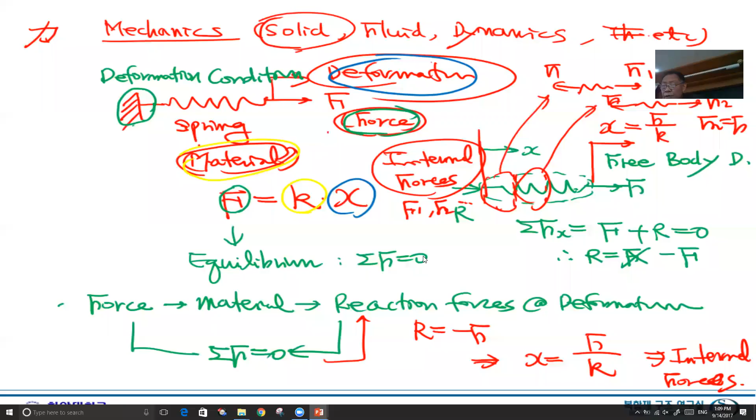Well, I will just briefly go through this slide to emphasize one more time what is the strength of material, what is mechanics of materials. That's the subject we are covering this semester. So we need to clarify the concept of the strength of material.

There are two keywords. One is mechanics and the other is materials. Mechanics, as I mentioned yesterday, is the subject about force. Okay, force. Well, I'm not sure if you understand the Chinese. This is a Chinese character to represent force. Okay, force applied to solid, can be applied to solid.

Solid means a material which can deform. Okay, it's solid, but it's not a rigid body. It is a deformable body. Deformable body means how much deform? Well, it depends on the material and depends on the force. But in most cases, in engineering materials or engineering structures, deformation is very slight, very small.

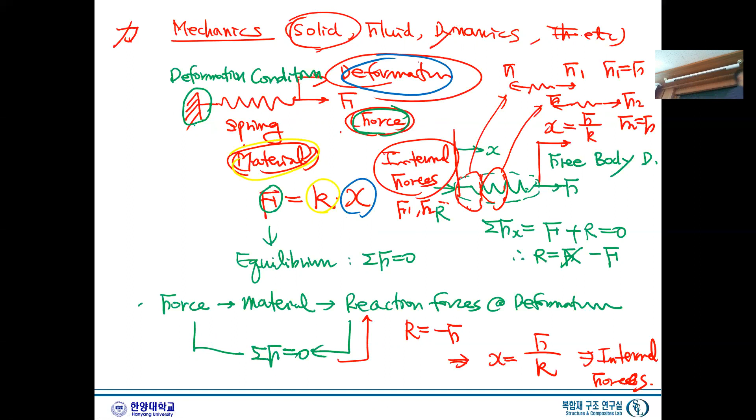In other words, we have a fixed point, we have a spring, we have a force, right? Now, let's take a look at this spring. And again, there is an equilibrium condition. Equilibrium condition simply said, we can say sum of F equals 0. All the F equals 0, and sometimes moment equals 0. All the summation of force and summation of moment have to meet this equilibrium condition.

Now, if we take a look at only the spring, okay, this is a force. And where we have a fixed point, we have a fixed point here. This is a deformation condition.

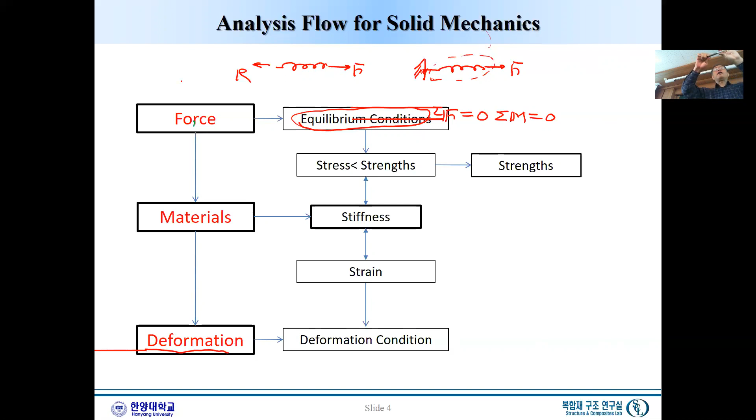But now we are considering a deformable body, which means that all the forces applied to a body have to meet force equilibrium, and then what we are focusing on is the deformation of this body. So when we apply a fix, how much force do we have to hold it? That is the unknown force R.

Unknown force R. So if the sum of Fx equals 0, then F minus R equals 0. So R simply has to equal F, right? So this is the force equilibrium. So now you can see what this force equilibrium is about.

And what is the stress? Well, if we have a section, a very small section, there will be internal force. And the stress is not clearly defined in the spring, but imagine instead of this spring we have a certain bar, and then we apply the force and we fix it. Exactly the same story goes for this bar.

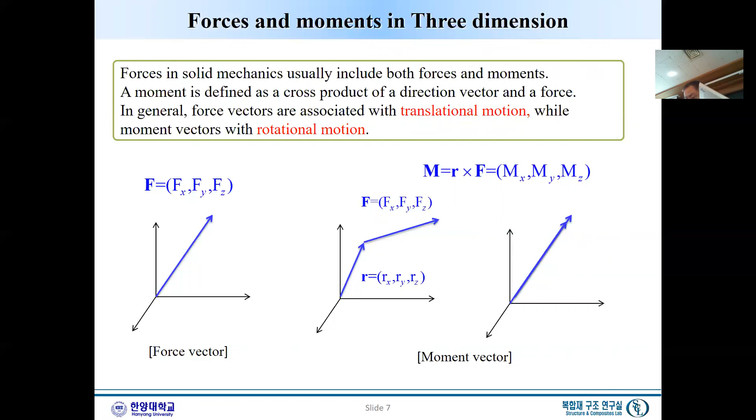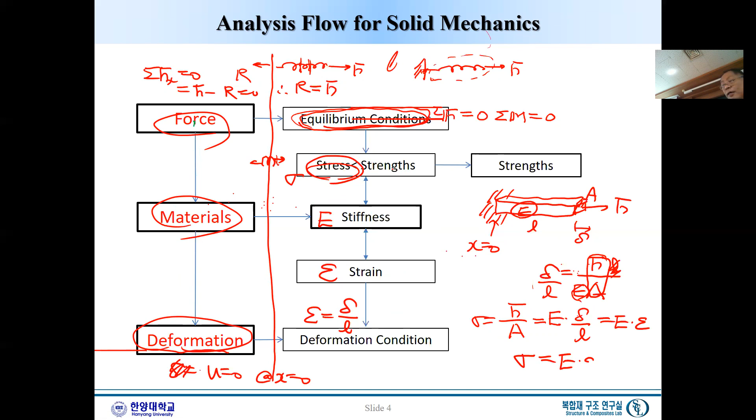And again, let's divide into two parts. This is the externally given condition, and this is the internal condition and internal concept. Say stress - this one is the stress and strain. This is a stiffness relation. And equilibrium, by the way, doesn't only apply to this force, but also applies to internal stress.

What does it mean? Well, if we cut this part, there will be a certain small part, right? Small part, there will be a certain force here, this force F, this force F. And on the right-hand side, there will be a body like that. This is the F and this is F.

So as you can see here, external force applied to internal, and internal will have all the F, F, F, F, F. So this equilibrium condition is not only applied to external force, which helps us solve reaction force, right? But also this equilibrium equation will determine how internal stresses distribute inside the body. Okay? So equilibrium and stress.

So the equilibrium equation applies to this stress, and stress-strain is the stiffness, and strain and deformation is the relation. So you can see that the three major concepts: equilibrium, material property or stiffness, and strain and deformation. Those three concepts are quite overlapped or linked by this concept.

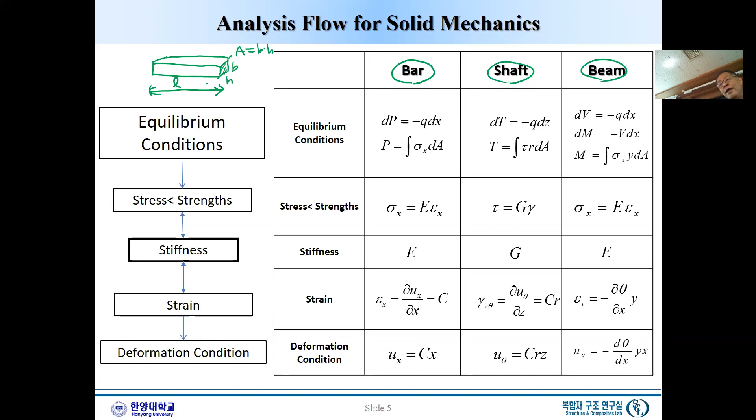And now, when we apply force in the direction of this length, we already noticed there should be the same force from the equilibrium condition. In this case, let's call it F, and this structure is called a bar. So in the bar, the structure supports load in the same direction as the structure.

How about the shaft? Well, in the shaft, it's not because of different material, not because of different dimensions, but the only difference is the way it supports load. In other words, the same structure designed to support a certain load, torque - then this structure is called a shaft.

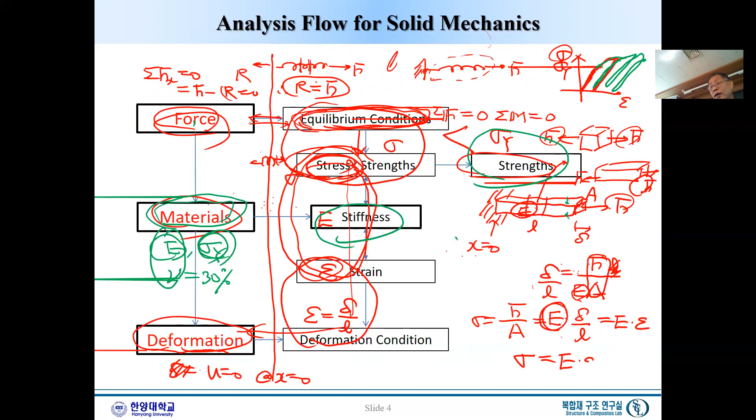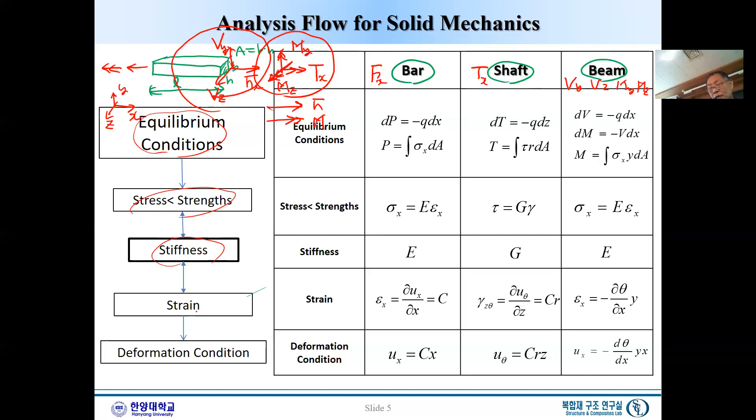Now, as in the previous slide, we went through equilibrium and stress and so on, and now this is exactly the same: equilibrium, stress, strain, and stiffness. In this course, strength of material 1, the equilibrium condition is that we applied a certain force, F, which caused all the stress. For example like this, and all these stresses, the summation of sigma x over the area A equals F.

This is the equilibrium internally, and this is pretty much the same. When we have this, we have a torque and all the shear stress distribution, and that is the equilibrium. So equilibrium and material stress-strain relations: shaft needs a different material property, which is shear stress, and stiffness is tension or shear. Torsion is always shear, and bar and beam is always tension stiffness. And strain is related here. Well, this is just a summary, so I will skip the detail.

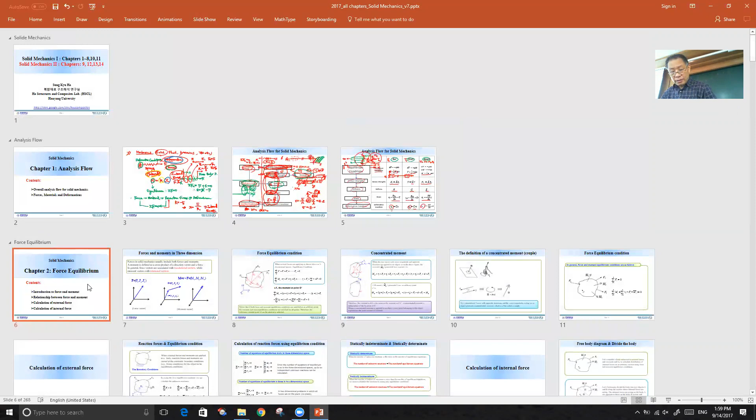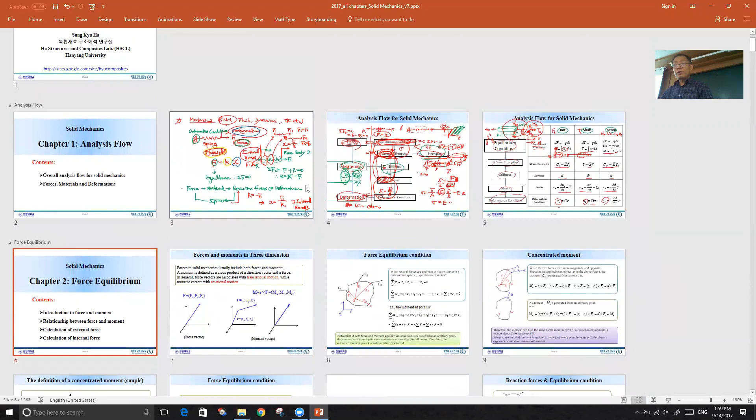Okay, this is a very critical part. So this week, as you can see, every chapter, I will show the chapters. Can you read this chapter name? Yes, force equilibrium. Why? Well, as we can see here...

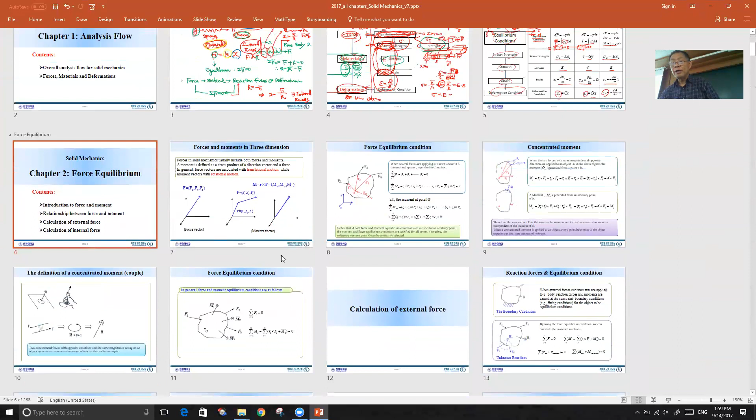The first concept is force and force equilibrium, right? That's why the first chapter is all about force equilibrium. That is chapter 2, the first chapter. And here we define force and moment and all the equilibrium conditions, starting with the general geometry and all kinds of load.

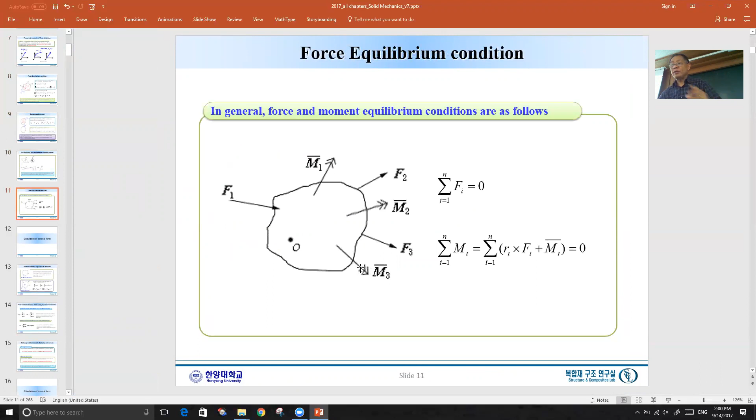Sometimes you have a reaction force, constraint. Sometimes you constrain, and this is the applied load. This is a material property. You apply the load with a certain geometry deformation condition. Always three: deformation condition, material properties, and forces.

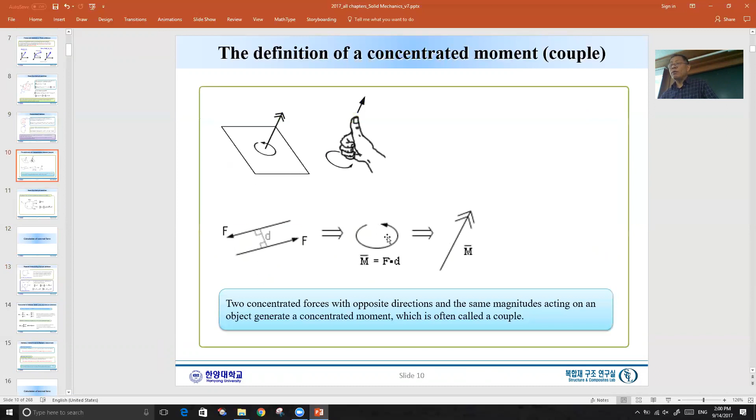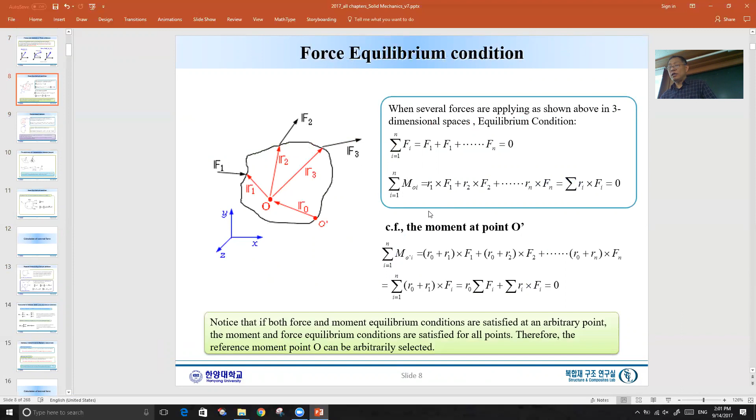Now there will be a certain reaction force. How do we calculate the reaction force? Yes, force equilibrium. We need a reaction force to move to the next step. So for that purpose, we define the moment. We go through all force and moment, 3 force equilibrium and 3 moment equilibrium. So this chapter is about force equilibrium.

Sometimes a very important point is how many equilibrium equations can we have? Only 3 force, 3 moment, right? These are force equals 0 and moment equals 0. Force is a vector and moment is also a vector. So always 6 equations.

Now, if we have a reaction force, somehow we have a fix, and the number of reaction forces is more than 6, can you solve that reaction force? No, we cannot. So this problem is called statically indeterminate. What is statically? Well, force-wise, force condition only, we cannot solve. So it's a statically indeterminate problem. But if the reaction force is less than or equal to force equilibrium...

Then reaction force can be solved by only considering equilibrium equations. This is called statically, or equilibrium-wise, reactions can be determined. So statically determinate. So it's very important to distinguish whether this problem is statically indeterminate or statically determinate.

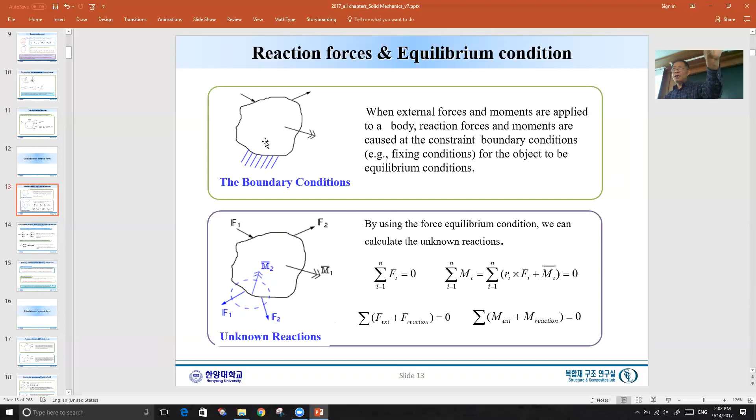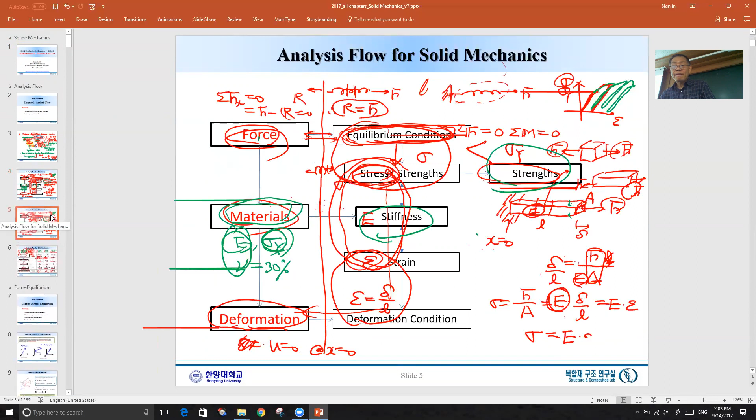Why can this be important? Well, the solving procedure can be very simplified. In this flow chart, let's say statically determinate. Determinate means that this is just force and reaction force, all can be determined.

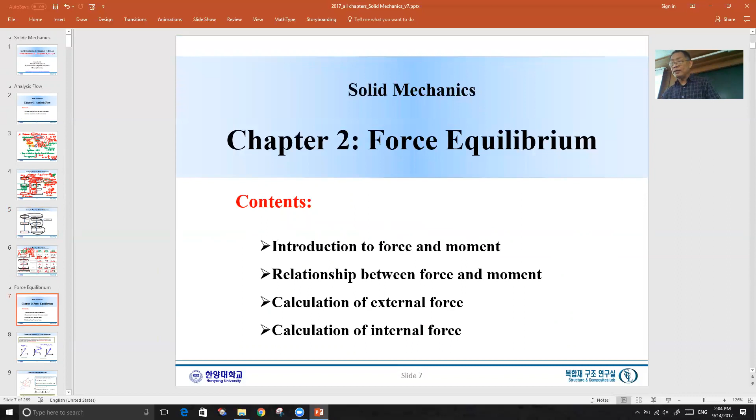And this problem all determines itself. Problem solved, all the reaction forces solved without considering the bottom condition. But a statically indeterminate problem cannot be solved this way because these are coupled. So all the unknowns have to be solved all together. I will go through this case, not much time, but anyhow, this is statically determinate and indeterminate, and this is force equilibrium.

What are the next chapters? Next chapters are about deformation. You remember the bottom: deformation, strain, stiffness, stress, and equilibrium, right? So we touched equilibrium, and now we consider deformations. And what is deformation? I'm sorry, that's not right, deformation is not the bottom part, it's the whole part.

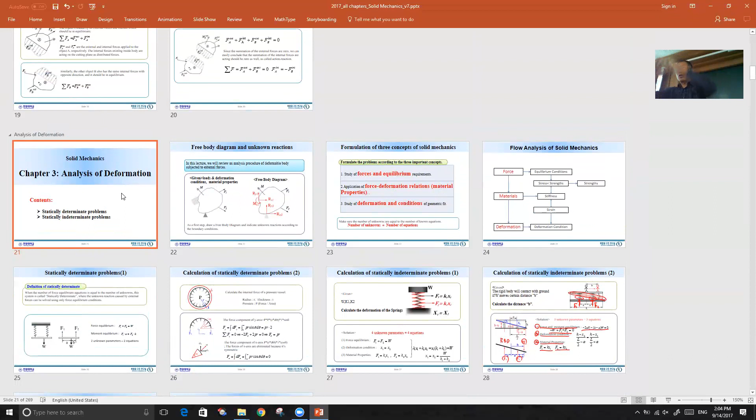Okay, this is all about statically determinate and equilibrium and force equilibrium and so on. This is just a simple application of the concept applied to a simple case such as this. We have two springs, inside and outside, and apply external load W. Okay, this is the case.

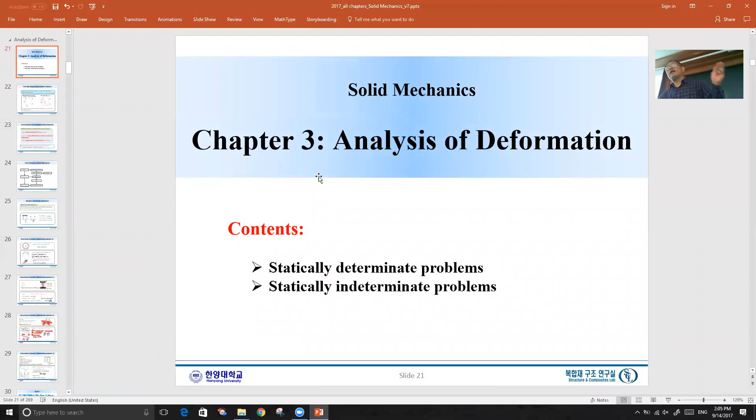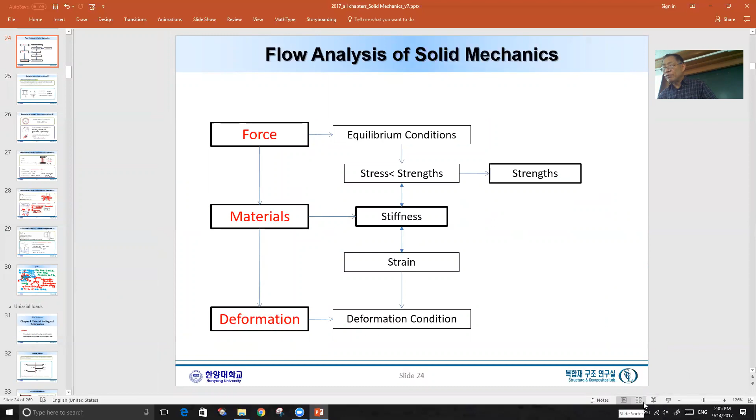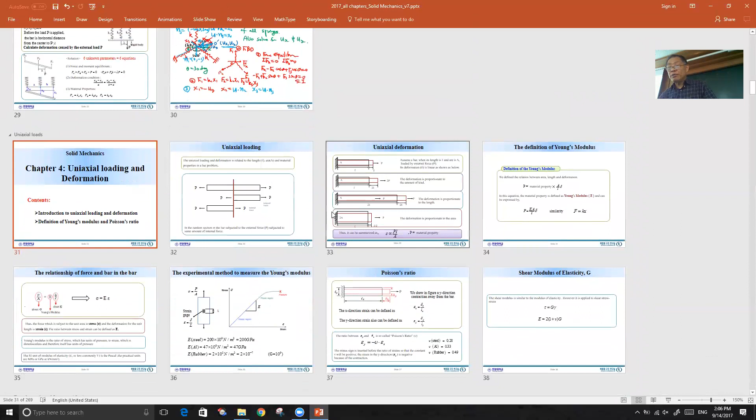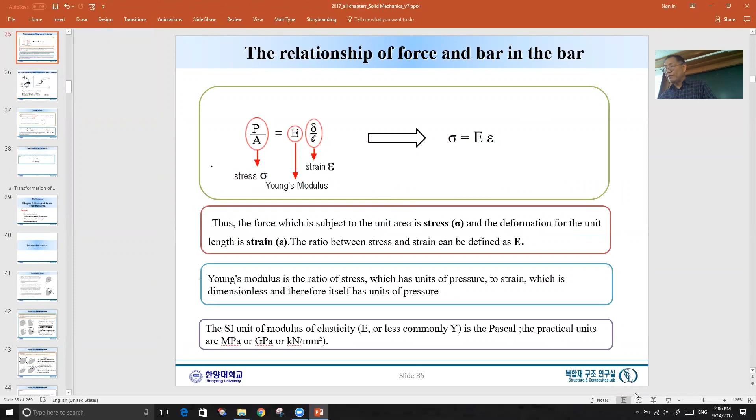So this is chapter 3, the application and considering analysis of deformation. In this chapter, we consider overall 5 steps using simple cases. And chapter 4 is uniaxial loading and deformation. This is the very simple definition of this, which I just mentioned: P over A is the stress, and delta over L is the strain, and Young's modulus. So this is a brief touch on uniaxial loading and deformation.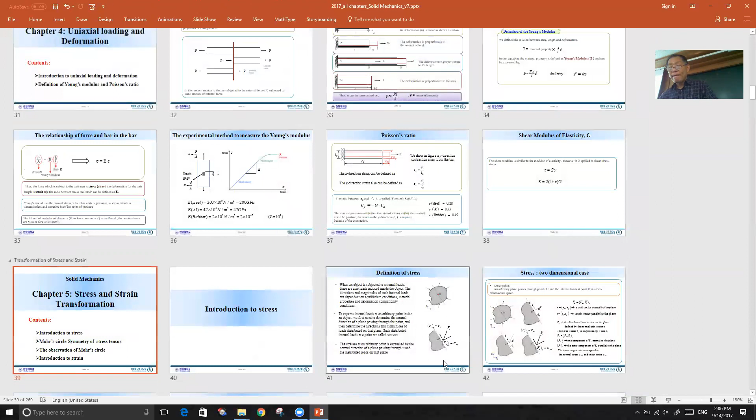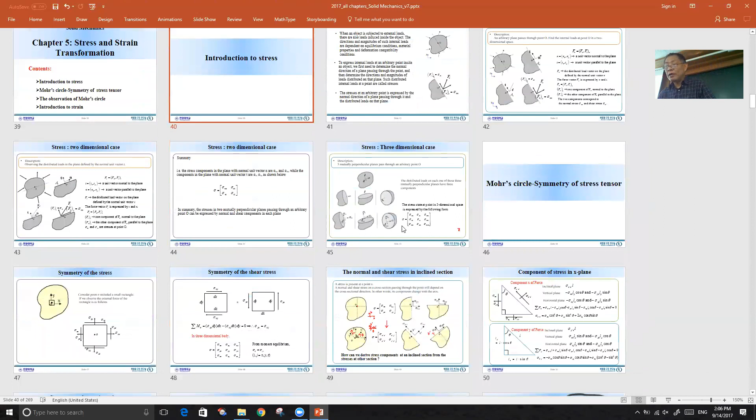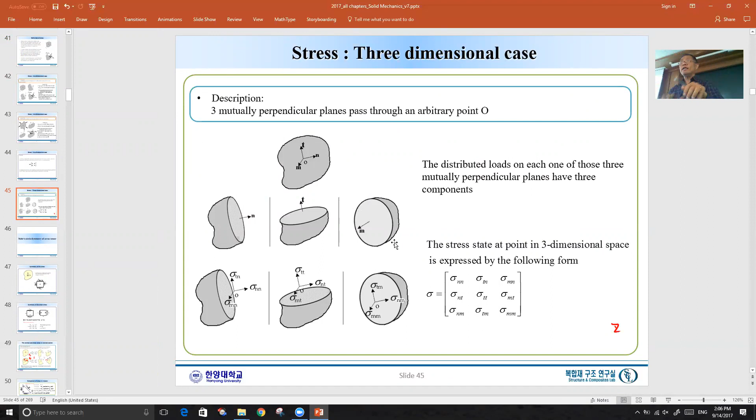Now here is stress and strain. And what is stress? Well, simply force divided by A. But in a three-dimensional case, you would have a little more complicated condition. In 2D, you could have an arbitrary cross-section. And in 3D, you have a more generic cross-section. So now you have to consider the generic cross-section and all the forces in each direction, in each cross-section. So this is the definition of stress.

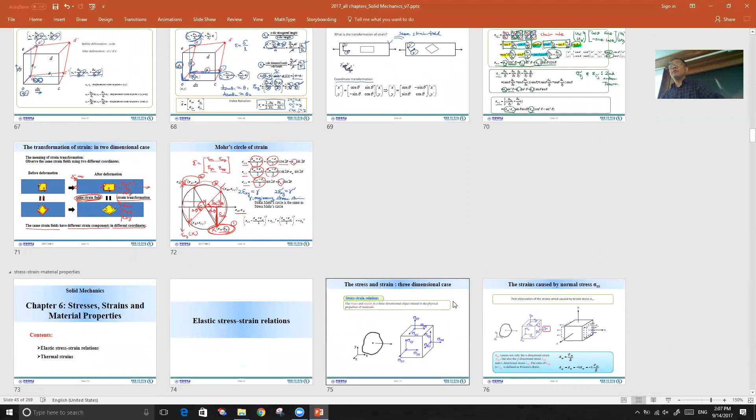And there is a certain subject about transformation, which is extremely important to understand stress, which I will explain a little later. And chapter 6, stress, now this is the chapter about material property. Okay, stiffness.

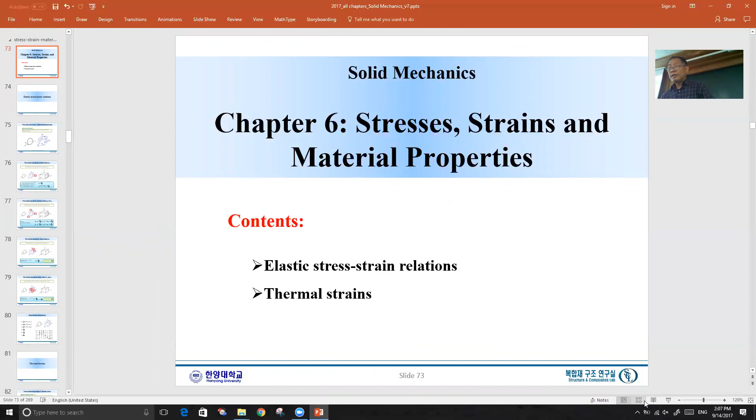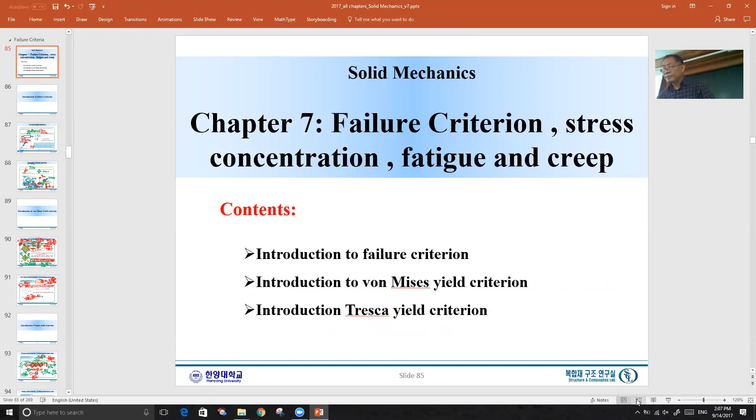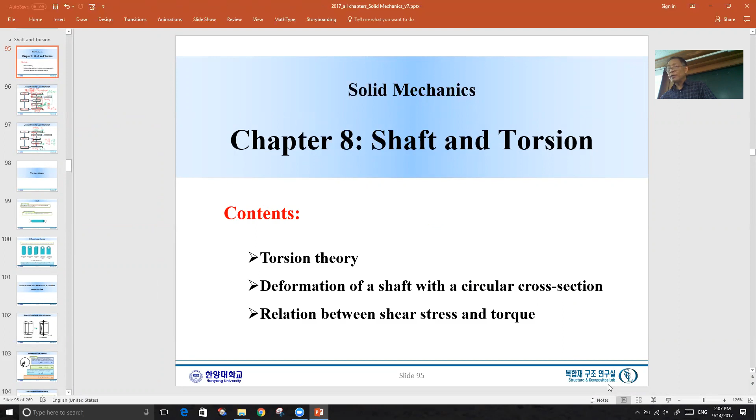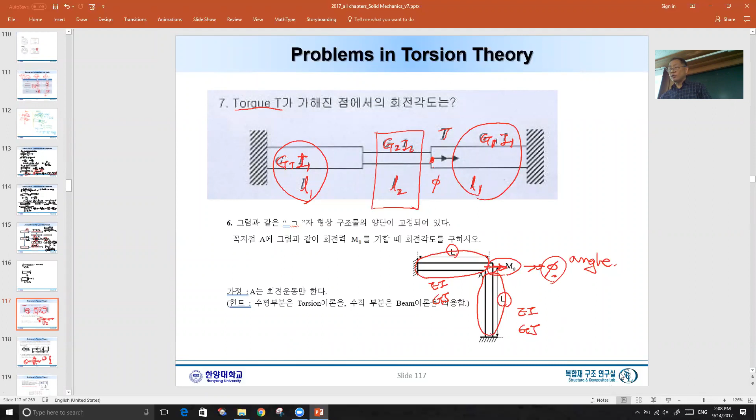And the next one is strength - you know, the 5 plus 1: strength and stiffness. Then we apply this concept to a shaft and bending, and that's the end of the whole course. So don't feel that this subject is really big, because in fact it is not - it's simply a flow chart. We consider a bar, and first we review each one: deformation, stress and strain, stiffness and equilibrium, and then the whole concept applied to a bar, shaft, and beam. That's the end of the course we covered.

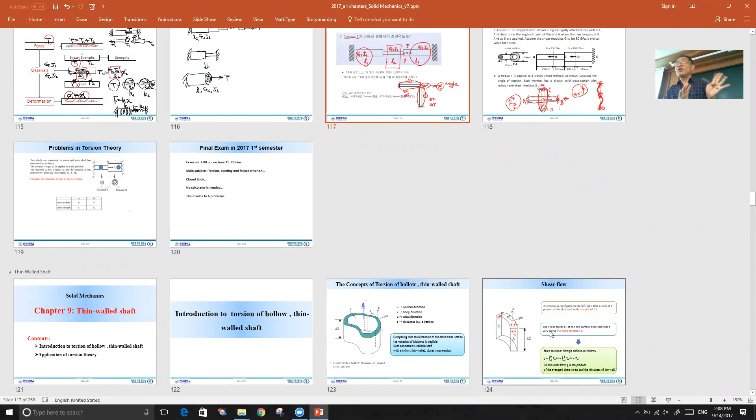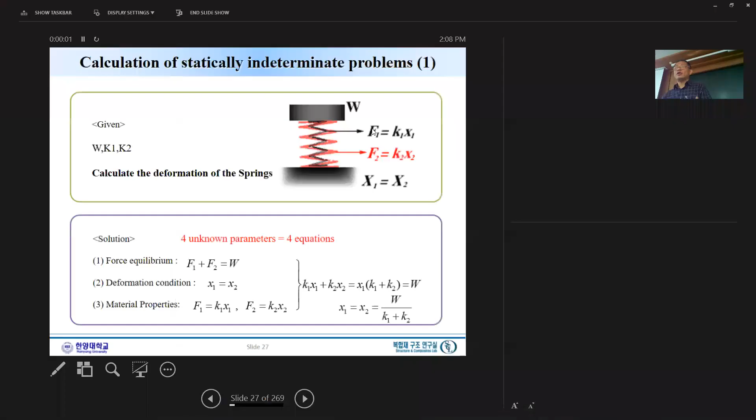So as an exercise, as I mentioned, I will get back to this problem, explain what it is, and clarify the task you need to do together. Okay, first I will explain what this is about.

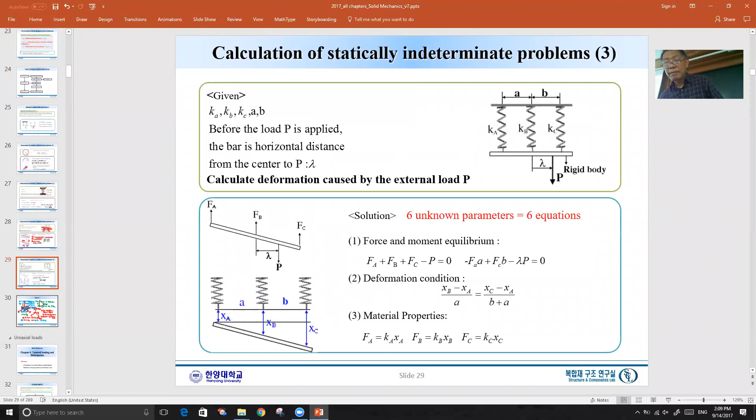Now, calculation of a statically indeterminate problem - indeterminate or determinate. Some may understand, some may not - that's okay, forget it for a while. Now pay attention to this case: two springs are supporting one big load. Two springs on the same axis, small spring inside and bigger spring outside, and both springs have the same length. One load is applied to the two springs together - this is the case, and these are given. Make sure you have force, materials, and deformation condition. This is not just to solve a simple problem, but to make sure you follow the 3, 5, 1 concept.

So even though it's pretty simple, try to follow the steps. Now, what to find? What we try to find is how much it deformed, and how much load is carried by each spring. Let me repeat: what we want to find is how much it deformed and how much load is carried by each spring.

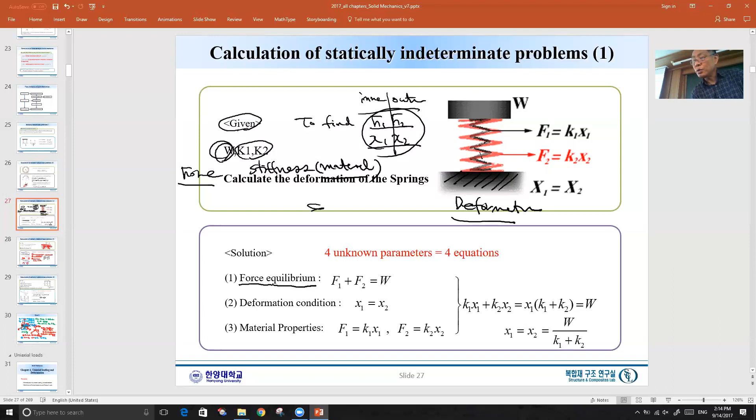So as you can see, force equilibrium - now you see the force equilibrium. To do so, we need to draw this: say W, these are W, and there is F1, and outside is F2. So force equilibrium-wise, if this is X, we can say total force X equals - now you have to pay attention to direction. This is a plus, but to do so, you have to make the right coordinate system. Always try to use a coordinate system, otherwise you can make a mistake. So F1 plus F2, and is this W minus or plus? Yes, minus, because we indicate upwards as positive. So minus W - that's why we got this equation.

Now, how many equations do we have? Only one equation from equilibrium. Why? You might say three force and three moment equilibrium - we should have six force equilibrium equations. Well, yes, for a three-dimensional body, but we have only one dimension, so we only have one equilibrium equation. But conceptually, this represents one out of six.

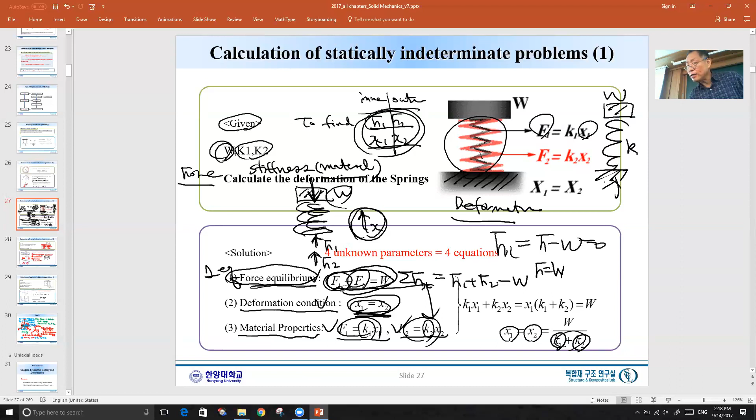Why? This is all coupled. As you can see, X deformation—the amount of deformation—depends not only on this but also on all the material properties. F1 is K1 times X1. As you can see, it all depends on K1 plus K2 plus K. It depends on K, which is different from here, right?

Okay, so anyhow, I really hope this is clear. I mean, this has to be clear. Follow all the steps, okay? But now, here is your task.

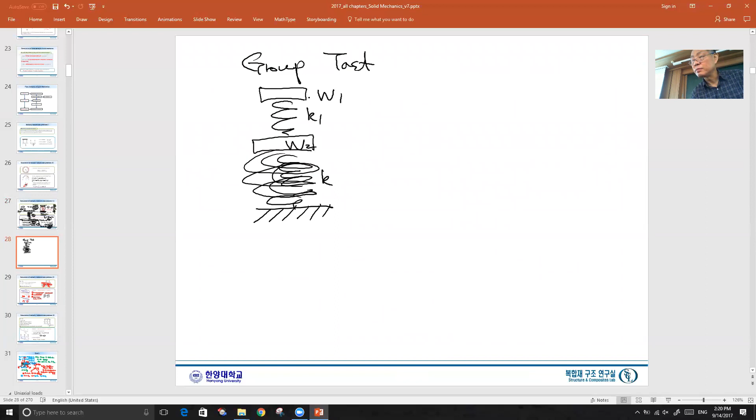Okay, we have four springs: one on top, and on top we have a W1 weight, in the middle there's a W2, and at the bottom we have three springs, all aligned. Okay, and these are given clearly—all the springs and all the forces. And now to find...

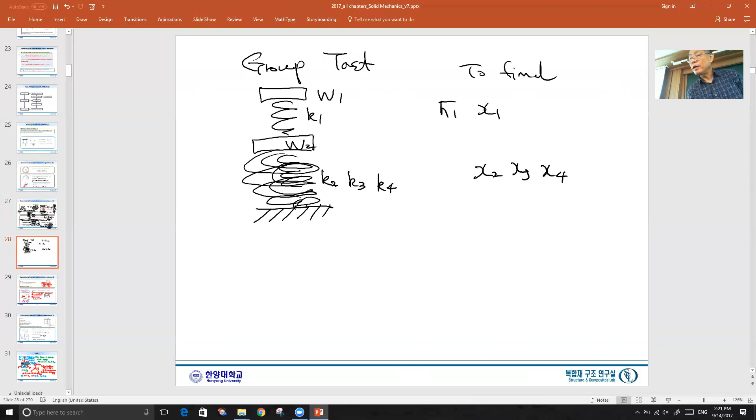...is this: the X1 deformation, and X2, X3, and X4. And of course, how much force—this is a force. Okay, you know what I mean, force and X, right? Of each spring. So this is the group task.